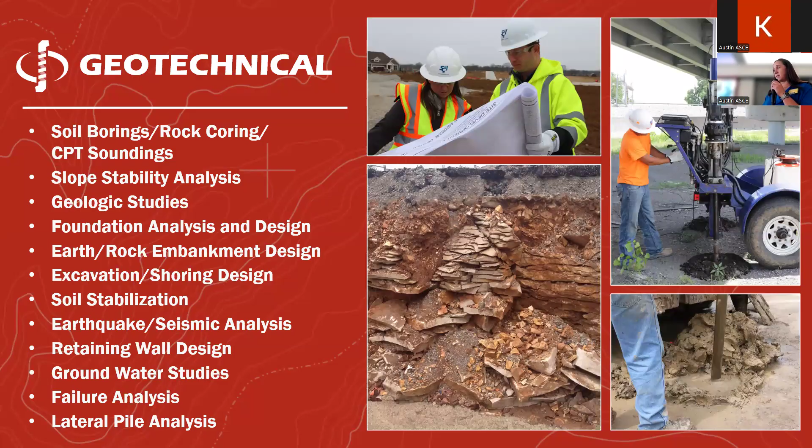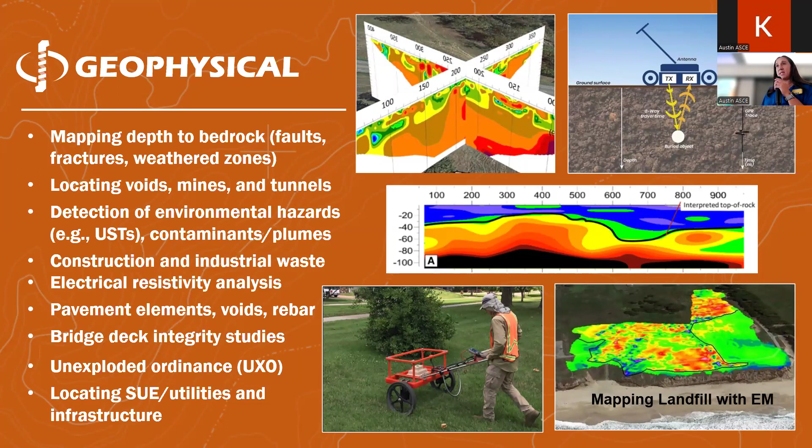So a little bit more about all those services. Your geotechnical: soil borings, pavement foundation design, retaining wall analysis, lateral pile analysis. We handle all that. We also, as a little sub niche, geophysical - ERTs, GPR, detecting your subsurface stratigraphy and USTs and other underground elements.

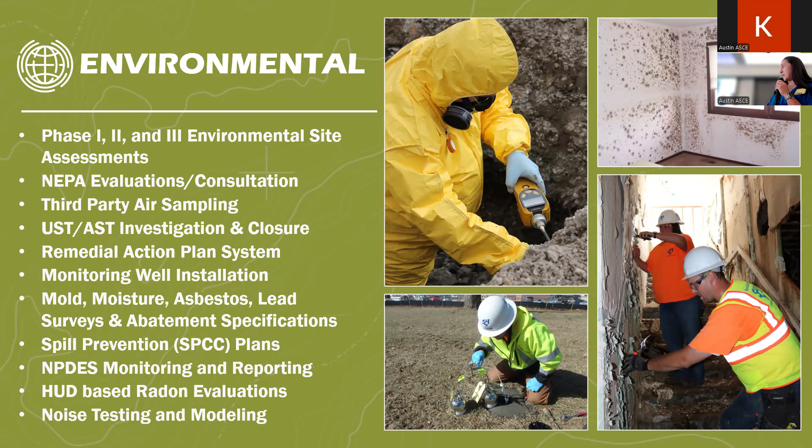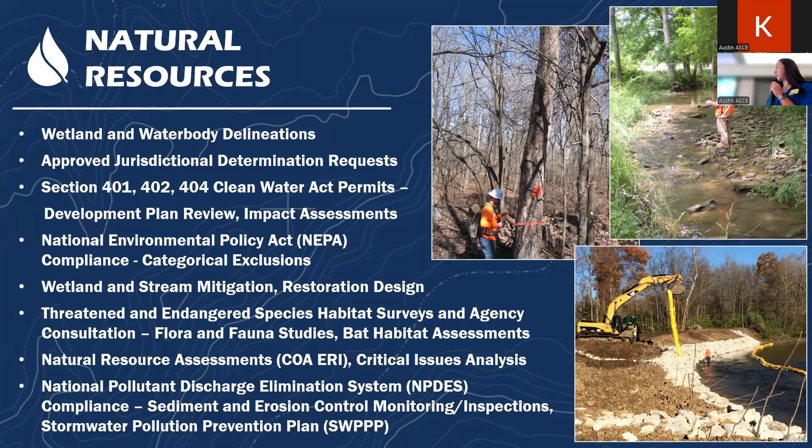Environmental services: phase 1, phase 2, ESAs, lead, mold, asbestos surveys, mitigation and monitoring, also noise analysis, SPCCs. Your natural resources: wetlands, delineations, mitigation, 401, 404 permitting. So City of Austin, ERIs, TNE, your SWPPP monitoring - we can provide all of those resources for your team. Your cultural resources: phase 1 archaeology, cultural resource surveys, categorical exclusions, architectural surveys.

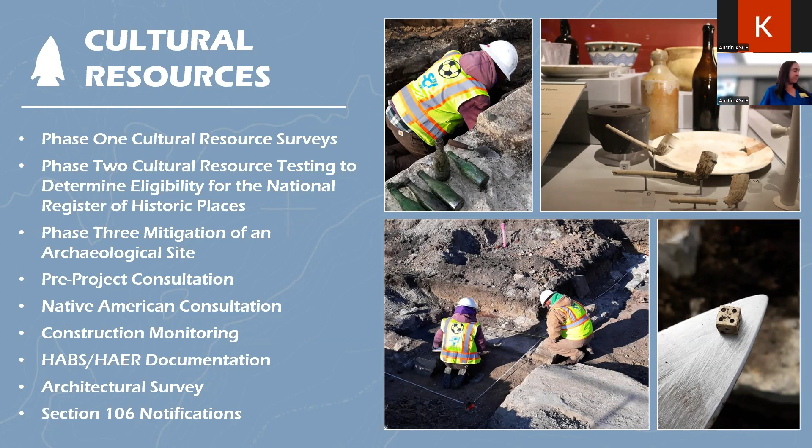Appreciate it. Good afternoon, everybody. My name is Niko Kalos. I'm a senior structural engineer for LJA Engineering, and I'm here today to talk to you guys about the three-girder steel straddle caps that we did for the Loop 1604 I-10 interchange project in San Antonio.

Before we get rolling, I just want to gauge the audience here in the room. I know we have a lot of people online, but how many of y'all are structural engineers? Okay, we got a good amount. How many of y'all are in the transportation industry? Okay, so a pretty good amount of you will know a lot of the terms I'm talking about, but I'll try to explain to those that don't, and we'll just dive right in.

So what's a straddle bent? Straddle bents are what we use to support a bridge, usually over a lower roadway. Typically that's going to happen over an entrance ramp or an exit ramp, frontage road, could even be main lanes in some cases, could be railroads. On the screen there are a few examples of what they look like -- those are all in the Houston area. And there are three common types.

They're cast in place concrete with mild reinforcement or just regular rebar, and those are good for short spans. They're fairly inexpensive, and most contractors don't have an issue constructing them. Stepping up the food chain, you have cast in place caps that are post-tensioned, so you can get that longer span and handle more load. A little more expensive, takes a little longer to construct, and you have to close traffic underneath when you do the stressing.

Then there's also precast caps that can either be pre-stressed or post-tensioned or both, and those are good for short spans. I think the technology is kind of moving towards medium spans, and they're great because you can get them in there quickly. But the reason they can't go that far is the weight starts to get prohibitive, so you can't lift them in place after a certain span length.

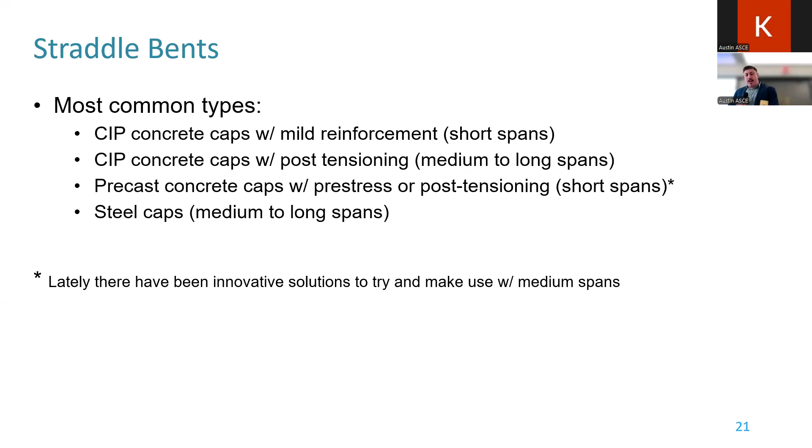And then we have steel caps, which are great for medium to long spans. They're great for low vertical clearance applications, and that's what we're going to be talking about today -- steel straddle bent caps.

Historically in Texas, there are really three types. There's the box girder type, which is the picture on top, and what that is, it's a built up section -- just a box, two flanges, two webs that are welded together. We call that the stacked cap. So the girders from the superstructure sit on top of that cap.

The second one would be box girder again, same type of section, but it has the corbels or brackets on the side for the superstructure beams. We use that for low vertical clearance, so we can eat up some of that superstructure depth. The final type would be a box girder again that's integral with the superstructure -- that's the bottom picture. So those girders actually frame into that cap, and that would be used when you have a continuous type superstructure and you need the vertical clearance.

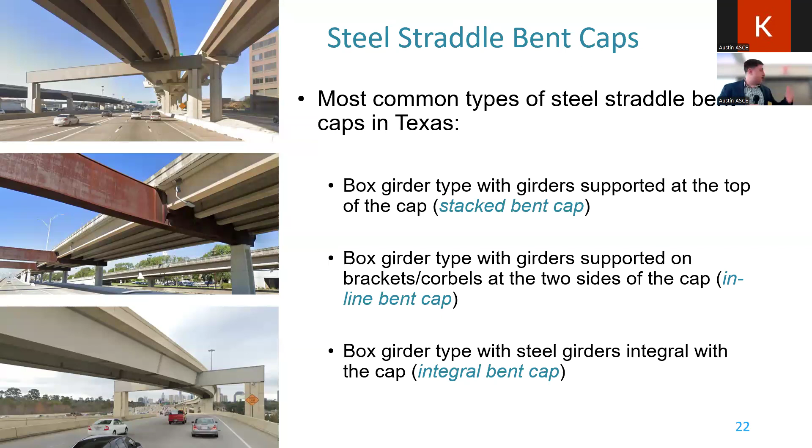So what are some of the advantages of those box steel caps? Well, they can get out longer, like I told you, versus concrete. There's minimum closure to the roadway below during construction, so if that frontage road or ramp needs to stay open, you can close it down in one night. You can lift the cap, set it, tighten it down, and you're done, and you can keep moving. They're easy to transport and erect because they're significantly lighter than a concrete cap.

There's a reduced load on the substructure and foundations for that reason as well. So some of the disadvantages have been they're typically higher cost to fabricate and construct as a result of that. So the construction cost is higher.

The box caps require the fabricators to work in a very confined space, so they have to do those welds on the inside of the box. And that has a lot of issues like health and safety issues and stuff like that, so that drives the cost up.

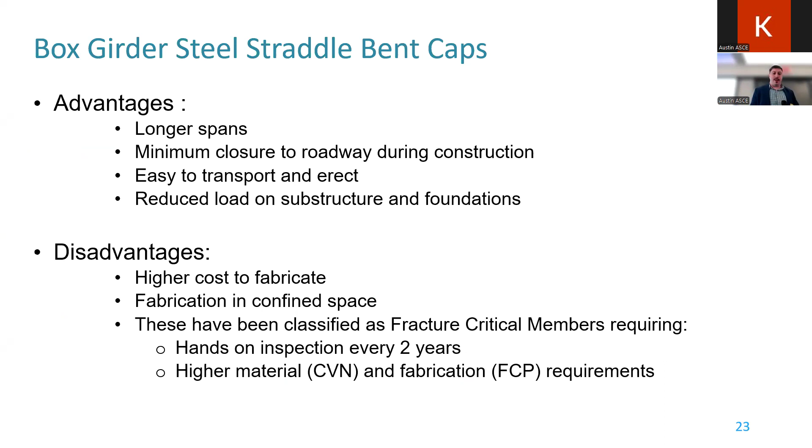And the big one is historically they've been classified as something called fracture critical. I'm going to talk to you about what that definition is in a second, but just know that means that structure is extremely critical. If there is a fracture, the bridge will collapse. There's no redundancy whatsoever. Because of that, they require inspection every 2 years, which is tough for TxDOT districts to deal with. And they also have much higher material and fabrication requirements, which again drives the cost up.

So let's talk about that redundancy. Fracture critical has been replaced with the term non-redundant steel tension member, because professors like to make stuff up, I think, but I think it does describe it a little bit better. There's no redundancy at all, and you can see the fancy definition up there from the FHWA. But the key is there's no redundancy, so if the tension flange has a fracture, the bridge will collapse.

As the FHWA has defined this, they've given us 3 ways that we can achieve redundancy. The first way, which is the easiest, is if you have 3 or more primary load members. The steel superstructure span you see in that picture has 4 beams, therefore it's load path redundant. No special requirements needed, right?

The second one would be system redundancy. Essentially what that means is that you, as the engineer, have to prove that your structure can handle a fracture and not collapse. That's something much easier said than done—the analysis would be pretty tough to do. There are some simplified procedures that TxDOT's working on for a twin tub girder system, like in that second picture.

The third type would be internal redundancy. I don't want to talk too much about this—it doesn't really apply to what we're going to talk about today, but it's something typically that we'd see with built-up members that have gusset plates and bolts, and that's going to be something like on a truss bridge.

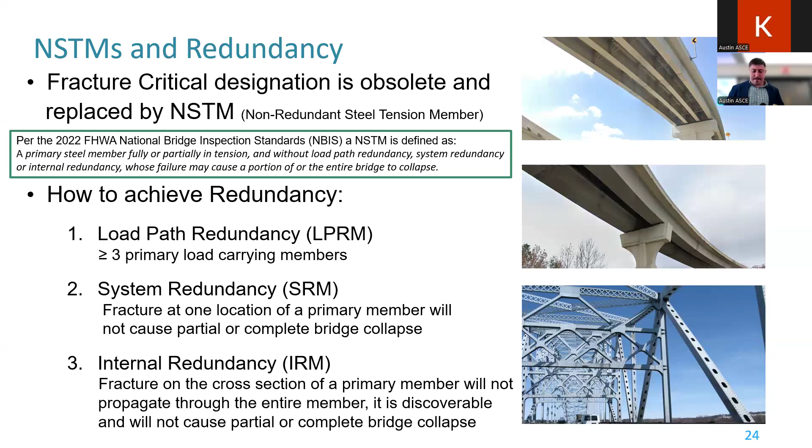So let's talk about the project. The Loop 1604 I-10 interchange project is part of the 1604 North Expansion project. The owner's TxDOT. It's 23 miles long, that's the whole corridor, and it's cut up into 6 different segments. LJA is the prime consultant on all 6 segments.

It was the complete reconstruction of the existing interchange, in segment 2. Segment 2 had a 12-month design schedule, so it was very aggressive. Keep in mind, that's from the time the ink dried on the work authorization to when we had to have our plans ready to let. So keep that in mind as I talk to you more about this project—it was very, very fast paced.

There's the project team. TxDOT's the owner, LJA is the prime, the contractor is Williams Brothers, and their fabricator was W&W/AFCO Steel.

A particular concern to TxDOT on this project was to minimize traffic impacts. Some of you have driven through there—you'll see that the traffic is pretty tough, but it's because there's a very high traffic volume there. I-10 is a major freeway, not just in Texas but the whole nation, goes coast to coast, very vital for our economy. And 1604 itself is quite busy. Plus we have major institutions right up to the frontage roads of the interchange, UTSA and Six Flags Fiesta Texas. Right around now, UTSA is generating some pretty big traffic movements—graduation, a lot of people leaving at once. Because of that, TxDOT really wanted us to focus on minimizing the impact of all types of construction, specifically with the bridge over the frontage roads. So they wanted us to limit that stuff.

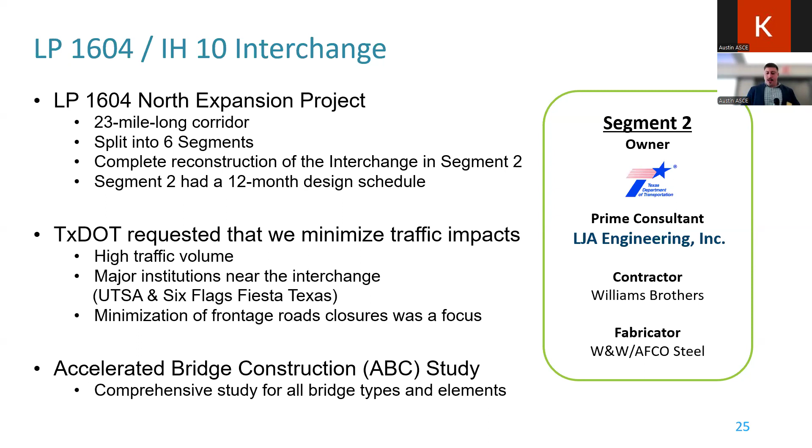So after we had laid out the bridges, we did an accelerated bridge construction study, ABC study, and we went through all the different components of the bridges and all the things that we had. But it wasn't just limited to the straddle bents, is what I'm saying.

This is kind of a preliminary exhibit that we developed for TxDOT as a discussion point. And that's kind of a schematic of the interchange as well. You can kind of see the old clover leaf is going away.

We're doing a new 8-directional DC interchange. So what we did is we went through every single straddle bent that went over a road and tried to figure out what made sense there in terms of accelerating. Some of them didn't make sense. There may be some that are over a frontage road that may be closed for something else, so you could get it built without having to do anything fancy.

But we went through there and we evaluated a lot of things, precast caps, and of course steel caps. And you see there, we had originally identified 7 of these caps, and at the end of the day, we ended up designing 9.

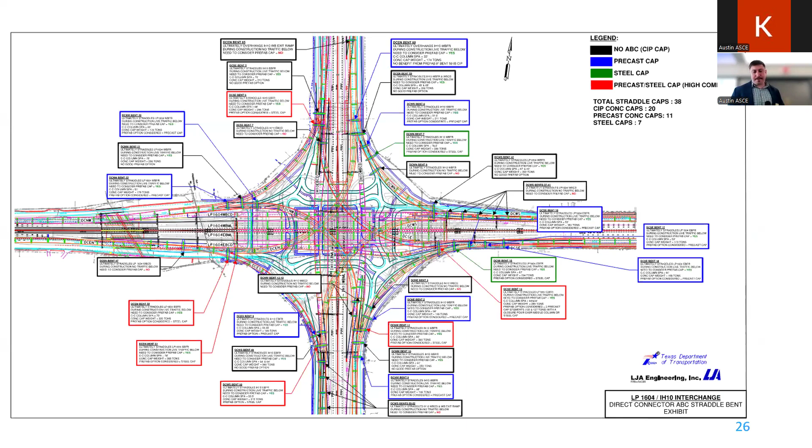So we knew obviously that the steel caps would give us a very good construction time versus something that was post tension. And also we had some spans that were very long. So without getting really advanced, we didn't find a good way for us to design those to be lifted, to cut them up so you can lift them. So we knew we were going to use steel.

We had heard about a 3-girder straddle cap that had been used and designed on the I-91 interchange in Connecticut. So we reached out to the designer and the fabricator of that particular cap, Ronnie Medlock and Mike Colmo. Shout out to those guys. And we picked their brains and kind of figured out what went well and what we needed to do differently on our project.

And TxDOT was very interested because, as I'll show you in a minute, there's 3 girders, right? So that means 3 primary load members, and therefore it is redundant, right? So we don't have to have those inspection requirements or the higher fabrication requirements.

So we had some differences from that I-91 cap. The I-91 cap had a continuous trap box girder, and that meant that there's only one center line of bearing. So that was right at the center line of the cap, which meant they had no eccentricities on the cap. But we had simple pre-stressed beams, so we had eccentricity to deal with. Also, we had our caps kind of overhang the column on one side.

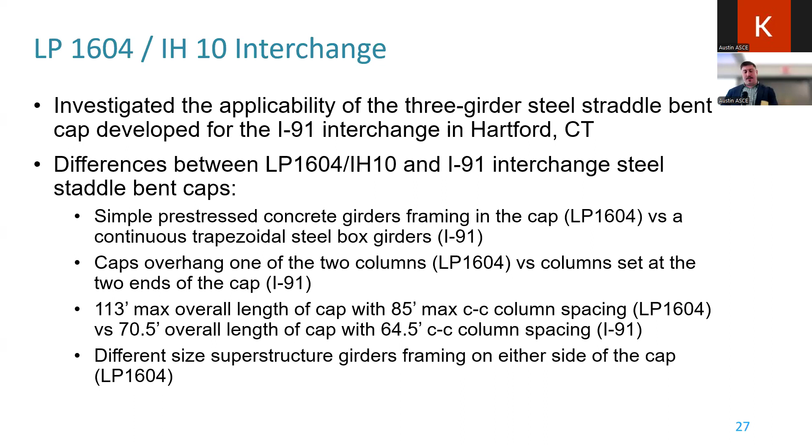So I'm going to kind of walk you through the components of those caps. So got our columns here, and you notice the orientation of the column is kind of a little bit different than you might see a normal straddle. It's 90 degrees. And one of the characteristics of these caps is that they get very wide, so you have to rotate the columns that direction.

I'll tell you now that the steel we used was A709 grade 50 weathering. So because of that, we have drip pan. Then we have elastomeric bearings, nothing different than what you'd see on a steel superstructure in Texas.

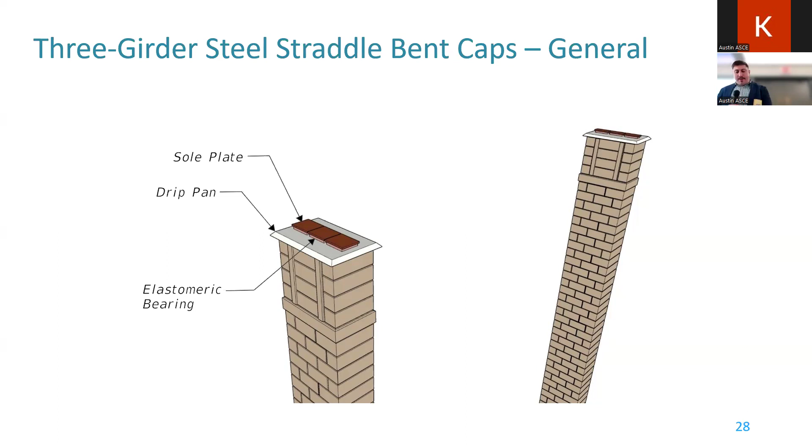Then on top of those, we have our sole plates. Then we got our 3 girders sitting on top of those, so there's 3 I girders. These are built up girders. For those of y'all that aren't that familiar with structural stuff, you don't find these in the steel manual, right? They're not rolled, they're going to be built up. So you have 3 plates, they get welded together.

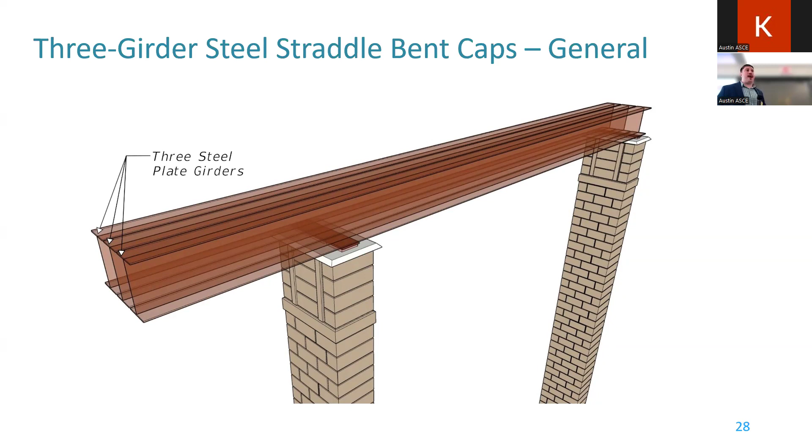But they're very easy to fabricate. The fabricators really like these versus the boxes. They're a lot easier for them to deal with.

So on top of the cap, we have all of our components that support the superstructure. We've got what we call a masonry plate. Don't get too hung up on that - it's steel, but it's just kind of a term that's used in the industry for a bearing plate. And that supports our girders. It's very much like a conventional concrete cap on a concrete bearing seat on a concrete cap.

And then where we had that big vertical difference, we had pedestals. And to kind of contain those and spread the load out, we had these bearing plates that grouped along the length of the cap. And then to keep the water out, we have some sealer plates.

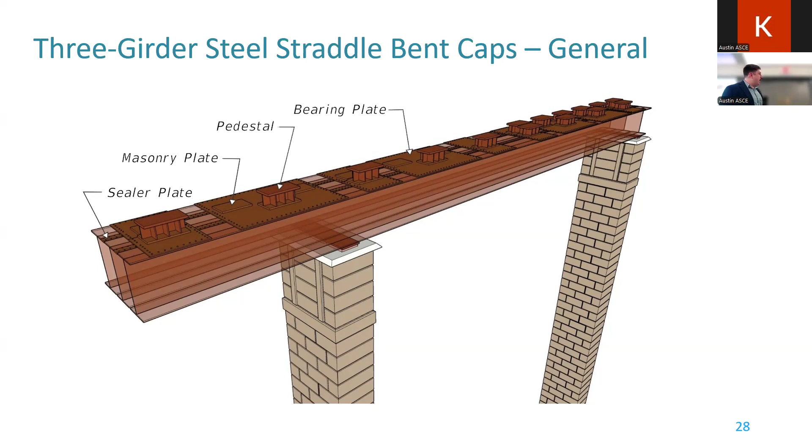Then we have our stiffeners. If you guys have ever designed a steel structure, these are pretty typical, nothing fancy about them really. We have bearing stiffeners at the bearings, a jacking stiffener so that they can jack the cap up and replace the bearings in the future. And then we have intermediate stiffeners.

What we tried to do there is put our intermediate stiffeners underneath all the point loads coming in from the superstructure to support the flange. But they're also there to give us a place to attach the diaphragms, which are bolted to those stiffeners. And that's where the magic happens - we'll talk about that when we get there. But those things are what makes the cap bend as one, and also gives it its torsional resistance.

While these things don't have to be inspected as frequently, they still need to be inspected. So we have holes sized for an inspector to step through. And then on the end, we have an access door. We have just a blank plate on the other side. And we've got FRP grating, which is what we use for the floor for the inspectors to walk on.

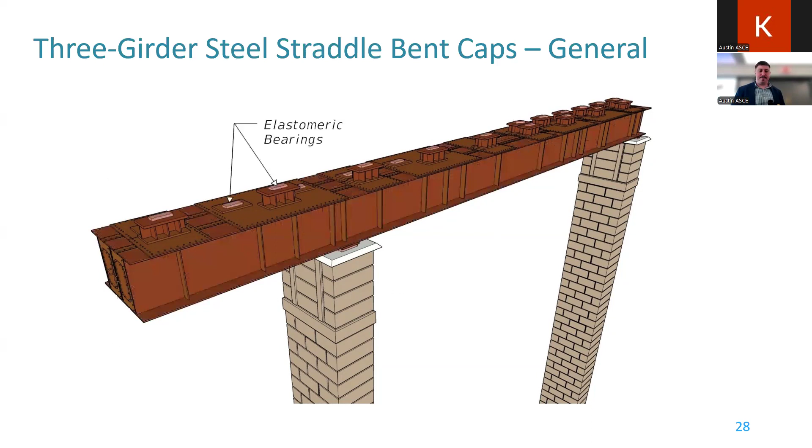And then on top, we just have regular conventional elastomeric bearings for the superstructure.

So let's talk a little bit about detailing. Those masonry plates - the cap I was just showing you all was flat, drawn flat. Well, where we had these caps were at the gores, so they're not flat, they're actually angled, kind of like a housetop. There was a cross slope break in them.

So in order to deal with the variability of maybe the depth coming from the superstructure and that variable slope, we had basically a beveled plate. So those masonry plates were beveled. We capped their thickness at a max of 4 inches. When we had a plate that needed to be thicker than that, we actually made a sandwich - the bottom one beveled, top one uniform thickness.

And we kind of set them by taking a fictitious bearing seat and setting it so that the long dimension of however that thing was rotated, we set the length of the plate that way. And then they were just 2 feet transverse to the bent.

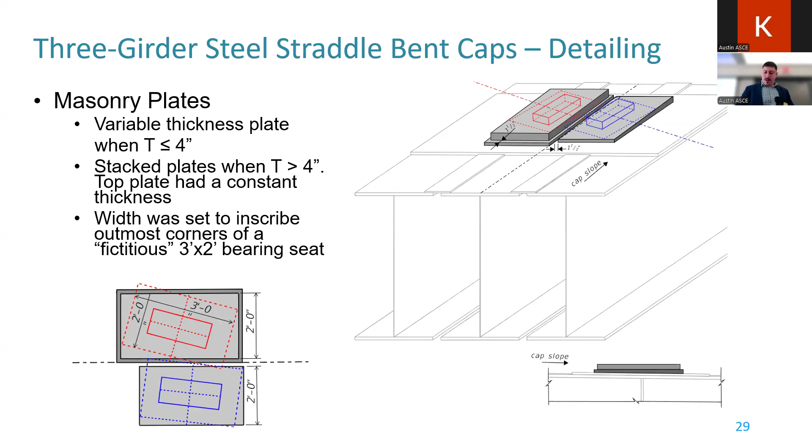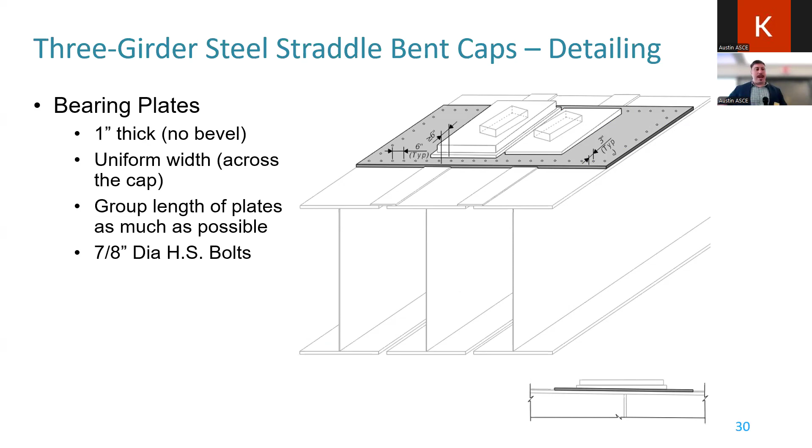Bearing plates - I get this question a lot. We did not consider these plates as providing any structural resistance, so they were just there to spread the load out from the superstructure. They're 1 inch thick, no bevel on them. They follow the cap, and were uniform width across the cap. We tried to group them as much as we could per cap so that we could make fabrication simpler. And they were just bolted to the top flange.

So the I girders - for each cap, we had identical flanges and widths, so same dimensions, thickness, height, width - those are all the same for each cap. Remember, I said we had 9 of them. They varied from cap to cap, but on each cap they were uniform. That was just to keep things simpler. You guys can imagine if you had to have a shop splice in the top flange, that could make it tricky with those plates on top.

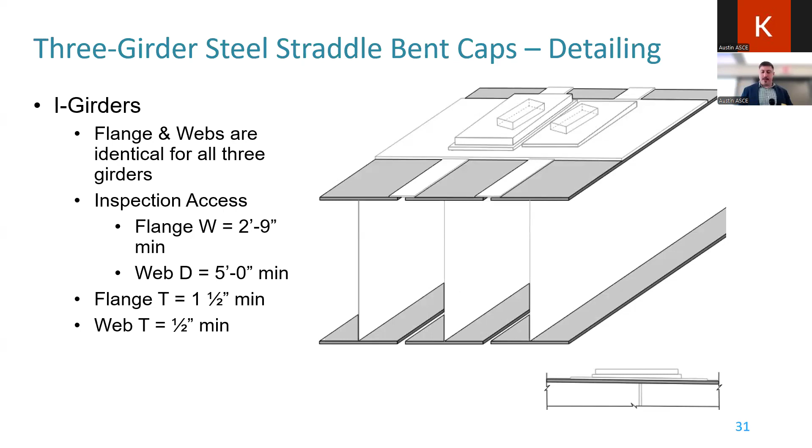Like I said, we had to provide inspection access, so some of the dimensions were governed by that inspection. This follows the TxDOT guidance that you'd have for like a trap box girder. We also set minimum thicknesses for the flange at 1.5 inch, and the web thickness was at a 1/2 inch min. We felt that just gave us a good starting point, and helped us satisfy a lot of the proportion requirements in AASHTO.

Diaphragms - like I said, they're there to transfer the load between the girders, so they bend together. And they also are there to torsionally stiffen the cap. The box caps are very torsionally stiff. I'll tell you, the box caps are a lot easier to design than these caps are. So they're great for us, the designer, but they're horrible for everyone else that's involved.

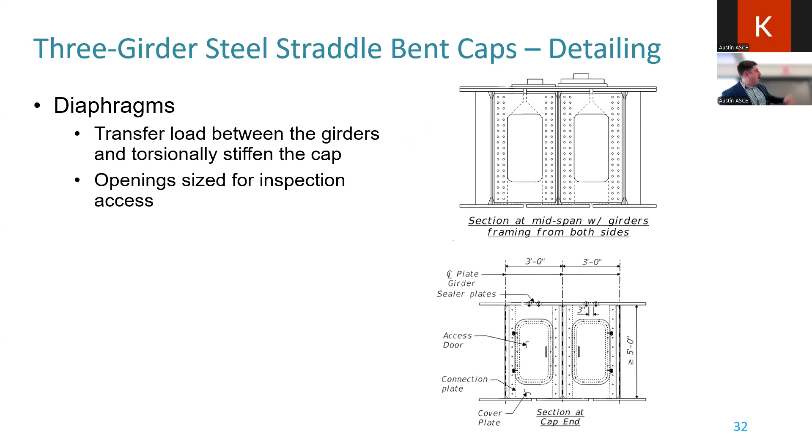And these caps, these I-girder caps, are kind of the opposite. They're a lot more intensive on the design side, but once they're done, the owner, the contractor, and fabricator have a much better time with them. And again, on the outside, you can kind of see the doors that we had and how that opening was set so that it's a continuous access for the inspectors.

So the stiffeners, which the diaphragm's attached to - the inspection hole size is 36 by 18. But the stiffener, where we had to reduce it for that inspection opening, it was too shallow - it wasn't big enough to support the flange. So we had to have kind of like a horrible style, you know, 45-degree bend in the plate there to get that full support. And we'll talk about the design of those stiffeners shortly.

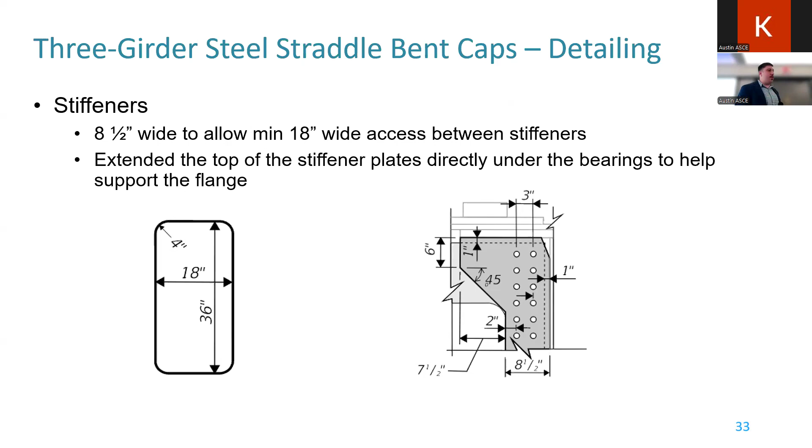Sealer plates are nothing fancy here. It's just to keep the water out. That's it.

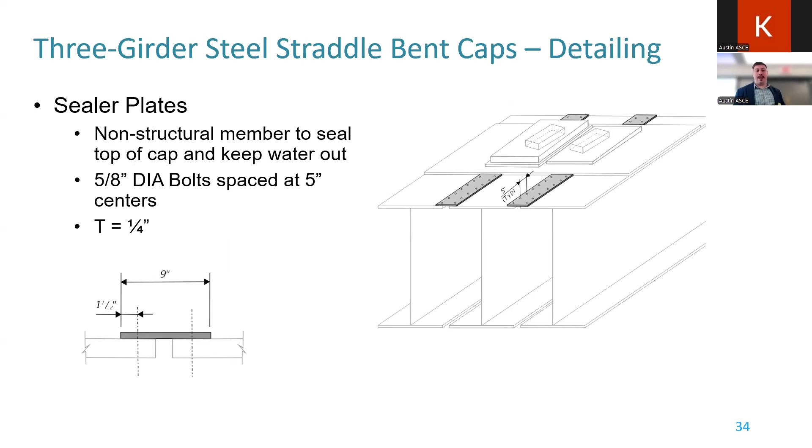Weathering steel is important to ventilate, and so that's another reason for the grating. It lets some airflow get into the bottom of the cap. It provides that walking surface for the inspectors, and it keeps the critters out.

That's really the reason we went with FRP, is that we could get a really small hole size, so we could try to keep out some of the bigger critters like bats and birds and stuff like that. The grating was attached to the flanges with stainless steel clips, so we didn't have to drill any holes into our precious flanges down there.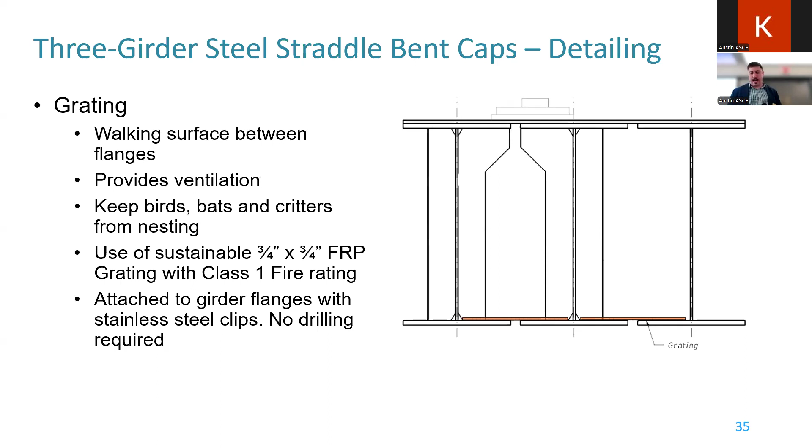Okay, so we're going to get into the nuts and bolts of the design a little bit. In order for us to understand how the forces flow in a structure like this, we're going to have to start from a simplistic fake beam, and we'll walk to the real thing from there.

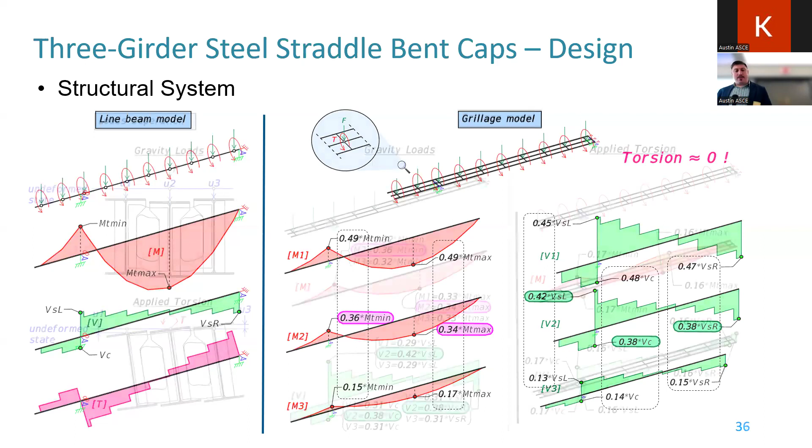So just something interesting to see how that kind of works. The key thing is that those diaphragms have a finite stiffness. If you look at the way this would deflect, if you put a force on the middle girder, the whole thing is going to bend a little bit. As it bends, you'll have three unique displacements, U1, U2, U3. And when we apply that torsion, we'll have kind of the same, except the middle girder will not really deform. It will rotate, but it will not displace vertically.

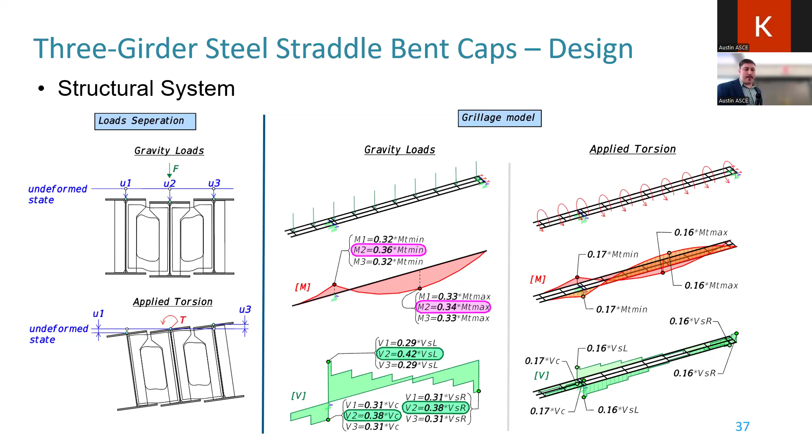So we chose to look at kind of dissecting the grillage model. Let's take out those components of torsion and just look at the vertical load, which is the gravity load tab. You'll see there that we are much closer to 33% on all the girders, because we took that torsion out so you can see that they're bending about the same. But again, the shear on the middle girder in that case is higher, again because the diaphragm has a finite stiffness. Then you can see what happens with just the torsion on the right, and that's that effect I was just telling you about. There's no shear at the middle girder, and those outside girders pick up a couple, which translates into additional moment as well.

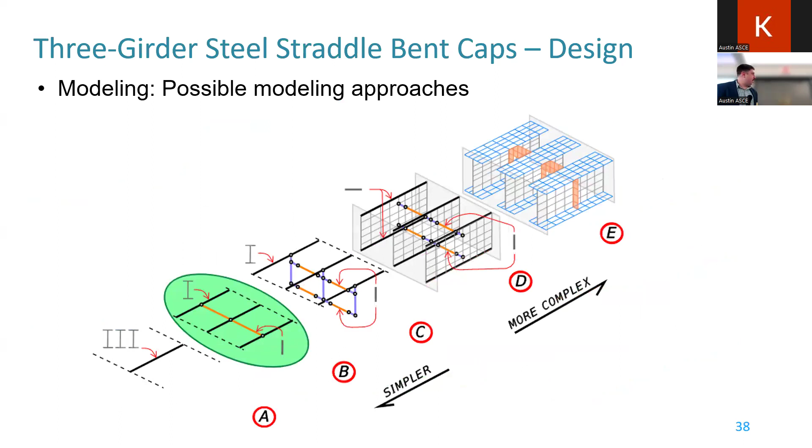So we had a lot of ways we could design these things. Here's a few options, all the way up from the real simple, all the way to full plate model FEA analysis. Keep in mind, by the time we were done with that ABC study, we were probably already four months into the project. So we went with the grillage model. It's well understood, and its limitations are understood as well. So that's what we went with for this particular analysis.

So here's kind of a close-up look at the model that we used. We have the grillage model on the left, which is what it kind of looks like in STAAD. We use STAAD for this analysis. It shows the full-blown system with the cap and the columns and the foundation. We separated those. We only did the cap really in STAAD and then took the loads out and designed the columns from that. But the way the model looked like is we had our plate girders with the exact dimensions of the plates in STAAD.

And for the diaphragms, we modeled them as a fake plate that had an equivalent stiffness of the real diaphragm, and we'll talk about how we calculate that. Our loads are not applied at that middle girder, and they're not applied off the center line of the other girders either, so they're offset a little bit. So what we did is we put rigid elements that are infinitely stiff to model that moment arm that you have from the center line of the cap.

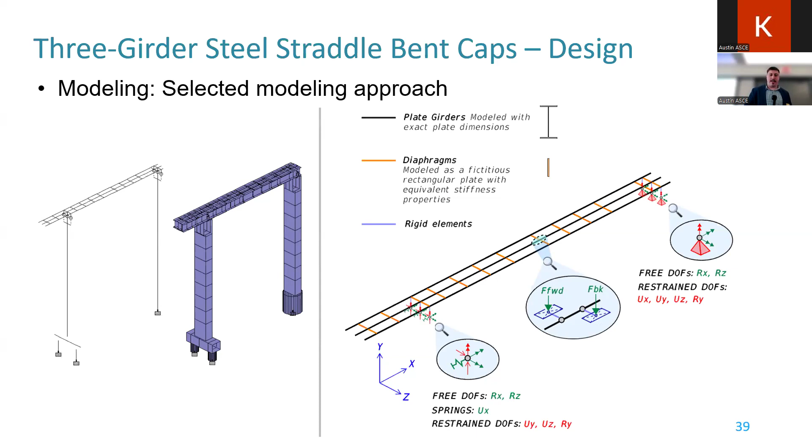So the diaphragms, we thought long and hard about how we were going to capture that, both from a stiffness perspective for the global model, but also how are we gonna design it. So we had an idea that the behavior of these diaphragms would model something called a Vierendeel truss. What that means, from some of y'all might remember from statics, trusses typically have no moment, they're either tension or compression. A Vierendeel truss is a moment frame that you make a truss out of. So it's a little bit different, but it looks like that. It's kind of like a box, there's repetitive boxes.

We looked at, okay, we did one full-blown finite element model, which you can see on the very far right, that mesh that was there. And we compared that to, so that's U3 was our displacement that we got. We compared that to the displacement we got from Vierendeel models, which is U1, shown in that figure, and we got very good parity. So we feel like it is behaving as we think.

So we said, okay, we kind of have a simplistic version too. What we did is we put a support right where that inflection point is, and kind of tried to reduce, even simplify it further to make it easier on ourselves. And so we saw U1, U3 were coming up very well.

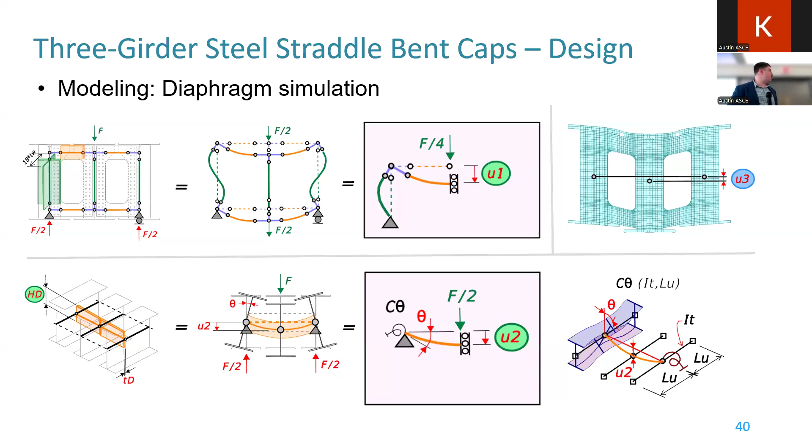So when we came up with that analytical expression for U2, we confirmed that it matched U1 and also U3, so we felt good about what we had. That's kind of what we did. I hope I didn't lose anybody there. There's a lot of equations, but the Vierendeel truss is pretty well known, and we used that as our guidance here. So what did we check on the design?

Obviously our I-girders we check just like any steel superstructure. So if structural engineers out there are familiar with those, it's very similar code checks. We checked the girders as non-compact sections. We had to add in, there is some lateral bending.

So we put the typical third of that lateral bending stress in with the bending stress. We looked at a lot of limit states, flange plate buckling. You can see there where the flange wants to buckle, a slender local bend buckling of the slender webs we looked at as well. And then lateral torsional buckling.

We had to look at that from a global standpoint, so the cap itself wants to buckle the whole system, and we had to check that as well. For shear, we ignored tension field action and just designed as unstiffened sections, which made our lives a little easier. And of course we checked the cross-sectional proportion limits, welds, bolts, tons of stuff.

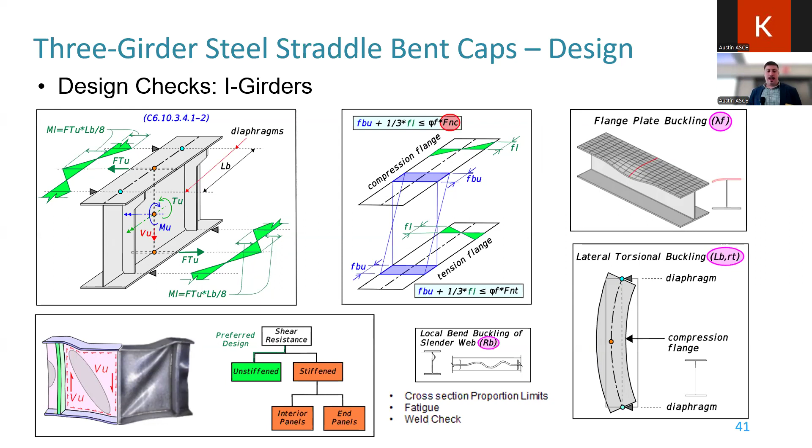And of course fatigue was also a big check we had to make. The stiffeners, nothing too crazy really with the stiffeners—again very similar to something you'd see on a steel design for a superstructure.

We did have to look closely at how we were going to deal with that corbel, the 45-degree deal. We don't have time to do finite element analysis on every single one of these. Every cap might have had 12 diaphragms, and we had 9 of them, so there's just no way. We just didn't have time. Even if we had the budget, we didn't have the time.

So we did a few finite element models to validate our approach. You can see one of them there where we're looking at how the stresses move. But what we did was basically break it down into sort of a free body diagram for how the forces move. We sized our welds like that, and we sized the thickness of the stiffener. So again, we used a lot of FEA as a guide for our more conventional analysis, to make sure we had a sanity check—are things coming out the way that we expect with our simplified models?

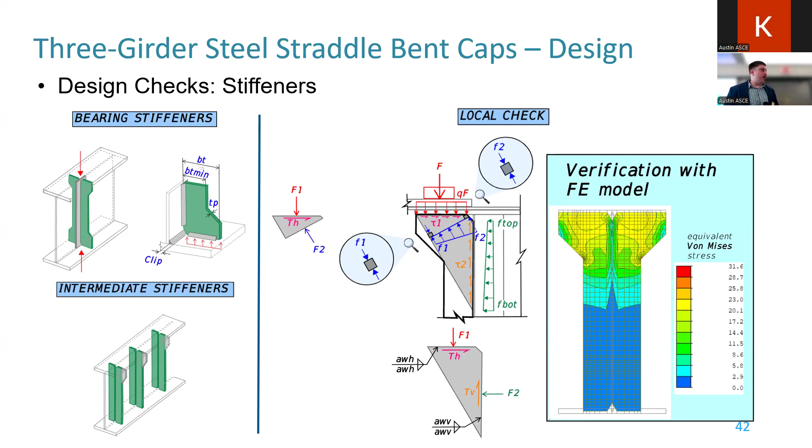The diaphragms—we really dug into this. How are we going to design it? We got to approach the stiffeners, which is how we get the whole cap, but how do we design the actual diaphragms? And again, the accurate way would be to do it with an FEA model, and you can see we actually ran one, like I said.

We did see here that there was a little bit more of a difference in accuracy between the FE model and our quick check. So what we did is we just dropped the allowable stress that we were going to use for the diaphragms, to help us sleep at night and know that we have a little bit extra capacity.

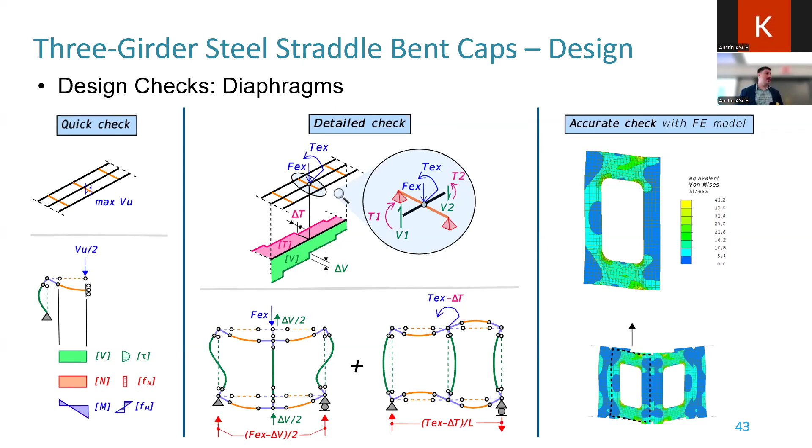And guys, this was the second one in the United States, right? So we did that in a lot of places—we didn't go down to 1.00 on pretty much anything. We put some conservatism in there.

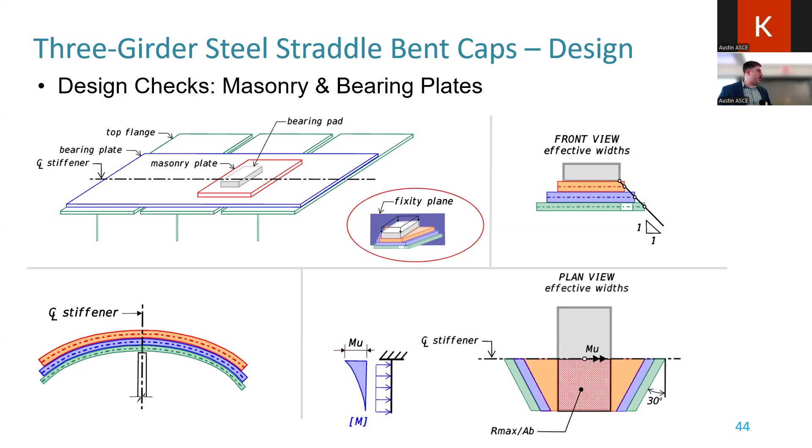And then some miscellaneous items, we had those pedestals that had to be checked, where we were basically looking at bending and shear in each direction. The top plate also needed to be checked for bending and shear.

The diaphragm bolts had to be checked. So we had to go through there and check all those bolts, since those are main structural bolts.

We had to do live load deflection checks, and we used typical AASHTO L over 300 for the cantilever and 800 for the main span. I'll tell you that deflection actually controlled the depth on several of the caps over strength.

And then we also had to check the elastomeric bearings underneath the caps. One thing I didn't talk about there is how we modeled the bearings - we had one that was fixed and one that was expansion, and we put the expansion bearing underneath the support getting the most load so that we could satisfy our slip and rotation checks.

But we had to look at a lot of different things because the interchange is being built in phases. There are several instances where, right at the gore where we have two DCs splitting off in plan view, one of those DCs is going to be open to traffic before the other one is constructed. So your torsions may be higher there than they will be in ultimate service. We had to look at those things very closely.

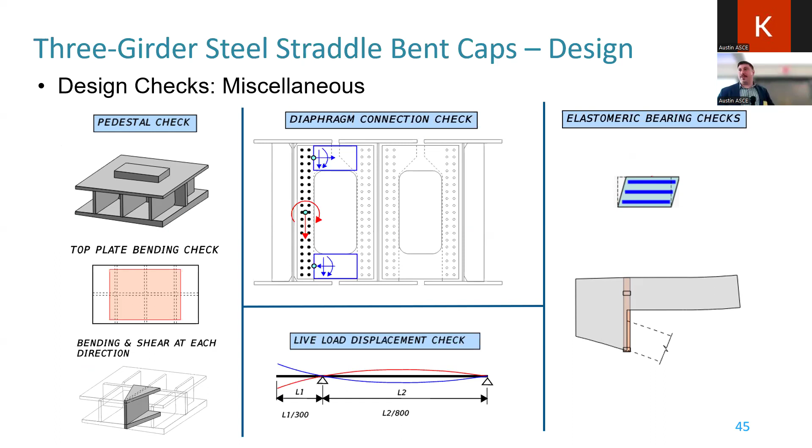We also had to look at construction items. A lot of people ask me about what we did there - on a case-by-case basis, we had to look at whether to allow or disallow a certain sequence. Ideally, we don't want one side to be completely constructed and not the other, so we wanted to go with beams on both sides, then pour one of the slabs. In cases like this, we did have to consider that stuff.

There's another shot showing the inspection access before they put the door in there. It's a tough job going in those things - I'm glad I'm not doing it.

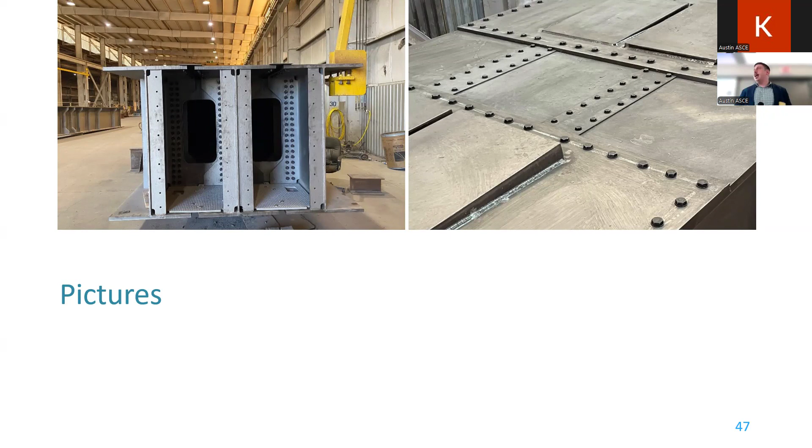Then there's a close-up of those bearing plates and the sole plates. Something interesting to note there - they actually opted to ship those caps with those plates separate. So they fit them up in the shop, made sure everything was in alignment, and then they took the plates off and just put the cap on a truck, shipping those plates separately. I'm not really sure why they did that, but that's what they elected to do, and then they just bolted them up and got them to the field.

One of the things we were a little concerned about early on is how they were going to look compared to a box cap, which looks very clean. When we were doing some 3D renderings of them, we were a little concerned - they were a little industrial, I guess is how you could say it. But I think they actually turned out really nice, and they blend in really well.

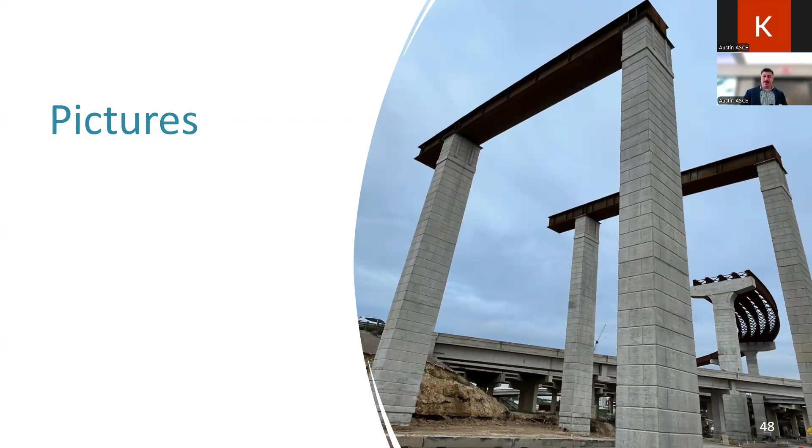There's a shot with the beams on those very caps. That was a few days later when they put the beams up.

So I'm kind of at the end, and I just want to say first, I really want to extend my thanks to TxDOT for giving us the opportunity to design these and trusting us to design these. They've always been a very pioneering organization, and so I just really want to thank them. And also, I'm just a guy up here talking about this.

I was part of a team, and I really want to thank all of them for their efforts. I'm by far not the smartest person that worked on those caps, and I think it was a true team effort. Like I said, we had 9 of them, and we got them all done.

We got very good feedback from the fabricators. There were basically very few questions during the shop drawing review phase, and they built them. And they loved them—the guys that are actually doing that stuff were like, this is way, way easier.

And they didn't have to meet any of those fancy requirements. The cost was, I'd say, a little bit less than what I expected, but this is a huge job with millions of pounds of structural steel, so I think a little bit has to do with that economy of scale. If you just had maybe one of these on your project, expect them to be on the order of a box cap, at least until they kind of catch fire in the industry.

So with that, I'll open it up for any easy questions, please. Yes—you mentioned cost. What's like an order of magnitude cost comparison for something like this compared to one of ours?